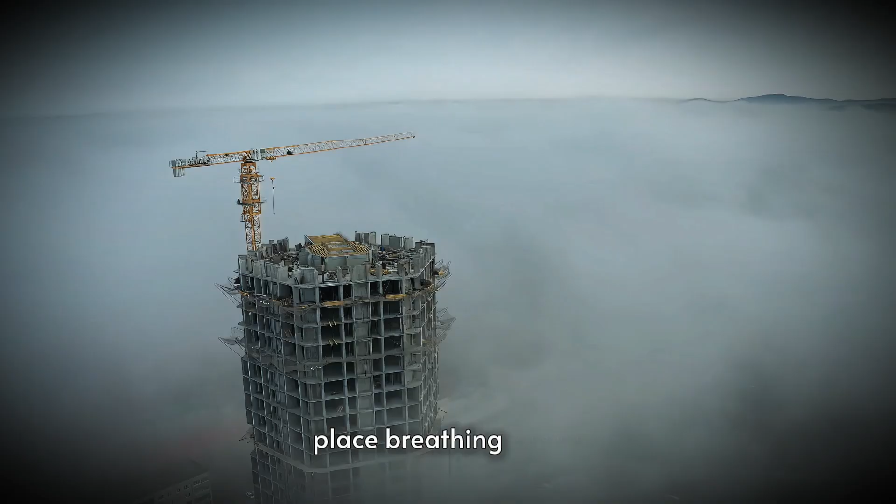In the lobby, down near the base of the main support column, a crack showed up like a thin black vein. Not wide, not dramatic, just enough to make every engineer in the room go cold. Because concrete doesn't crack in the middle of a celebration unless it's already been losing a fight for a long time. The air smelled like new paint and fresh stone, but under it there was another smell. Dust. A dry, chalky bite that shouldn't be there on day one.

You don't notice it if you've never been around stressed concrete. If you have, it hits you like a warning flare. A few people drifted closer, curious. They stared like it was a weird stain. Someone laughed. Someone said the building was settling. That word gets used like a blanket. Toss it over a problem and hope nobody looks underneath.

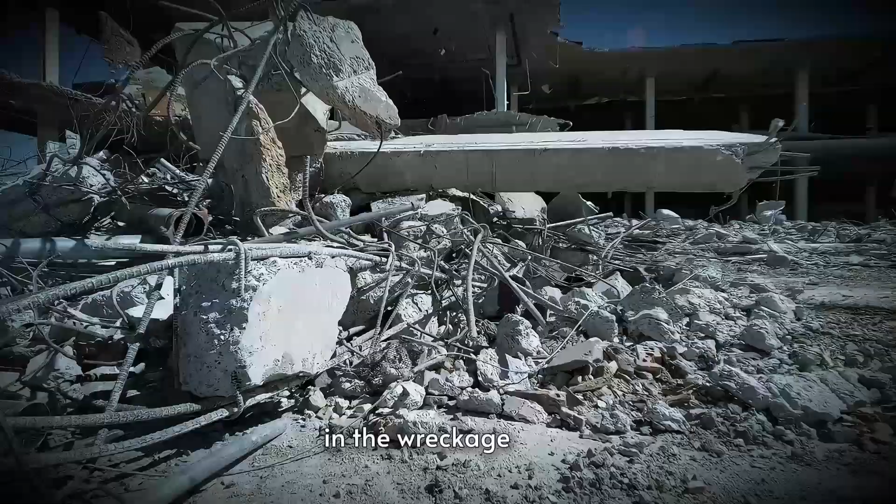But here's the thing. Settling is slow. Settling is a quiet math problem. This was a loud one. The crack climbed, millimeter by millimeter. Not fast enough for a stampede, just fast enough that a sharp-eyed worker stepped back and whispered, "That wasn't there." And now we're standing in the wreckage later, trying to answer the only question that matters. How did this even happen in a building that was supposed to be luxury?

Because the ghost detail is still out there, in plain sight. A high-end apartment block that looks perfect in photos. Glossy ads, clean lines, big windows, and it sits completely empty because it leans 3 inches to the left. 3 inches doesn't sound like much until you stand at the bottom and look up. Your eyes don't lie. The whole thing feels like it's slowly trying to fall over without making a scene. That's not a haunted house. That's an engineering mistake you can measure.

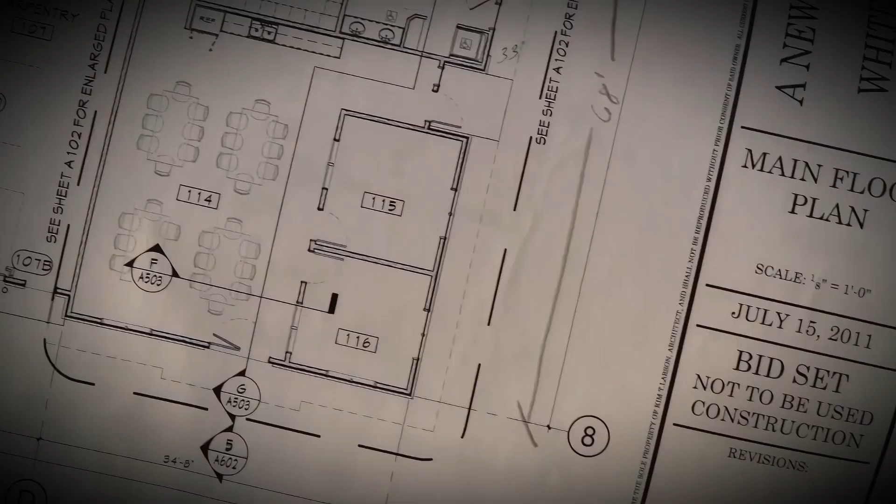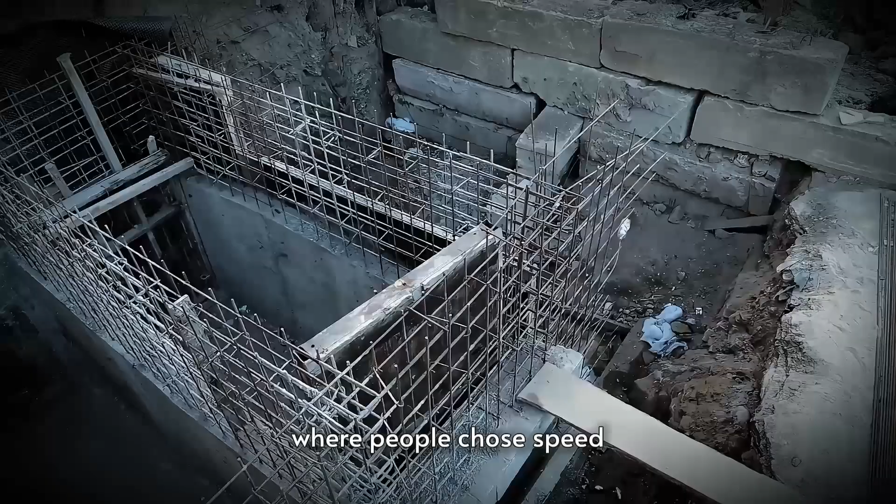And when you pull on the thread, you don't just find one bad decision. You find a chain. Blueprint error. Subsoil stability is ignored. A foundation failure that didn't happen in one dramatic moment, but in hundreds of quiet moments where people chose speed, money, and optics over reality. It starts with paper, not the concrete, not the steel, the paper. In the final drawings, the architect used the wrong units.

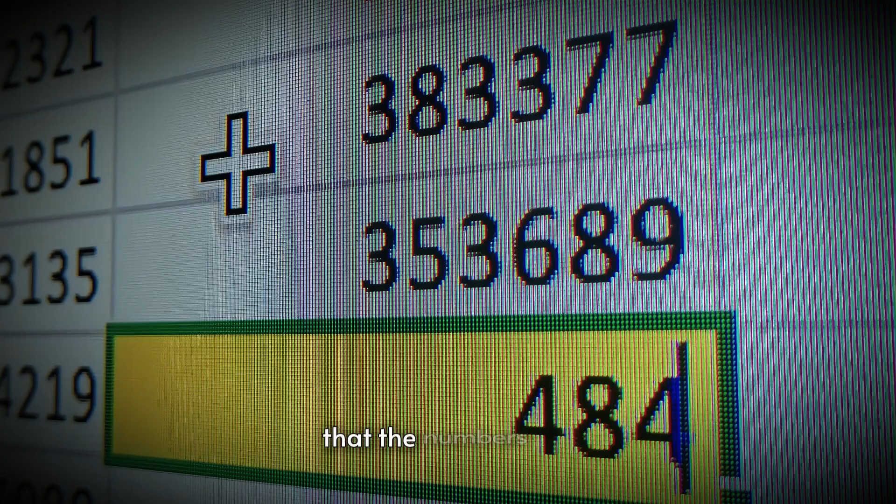That sounds small, harmless, like a typo, like something the software would catch, like something a whole team would never let through. But that's exactly how disasters begin, not with a villain, with someone tired, someone rushed, someone certain they're right, someone copying a detail from an older file and not noticing that the numbers are speaking a different language now. It's one of the oldest traps in engineering.

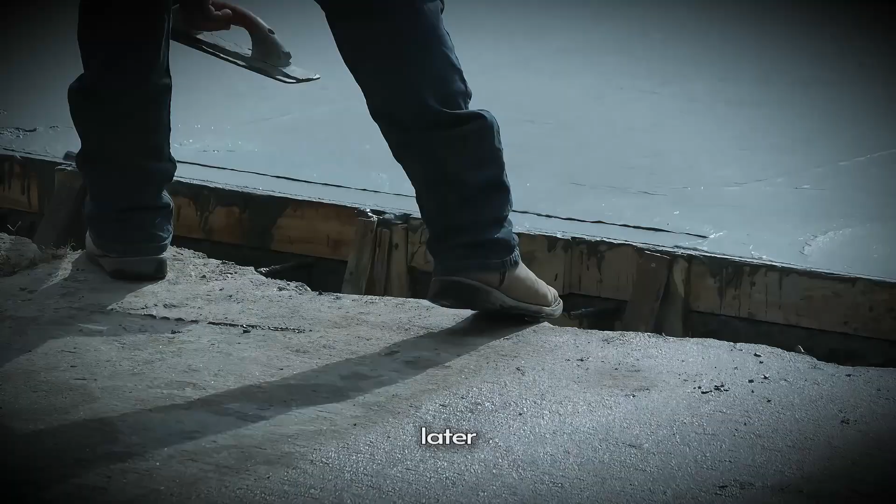Inches pretending to be millimeters. Feet dressed up like meters. A clean line on a blueprint that's actually a lie. And the lie doesn't show up on the screen. It shows up months later when you pour real weight onto real ground. The job moved fast. Too fast. The developer wanted an opening date locked to marketing and sales. The building wasn't just a structure. It was a product launch.

That changes everything. When the calendar becomes the boss, physics gets treated like a complaint. So people did what they always do under pressure. They trusted the drawings. They trusted the chain of approvals. They assumed somebody else had already checked the numbers. And out on site, crews built exactly what they were told to build.

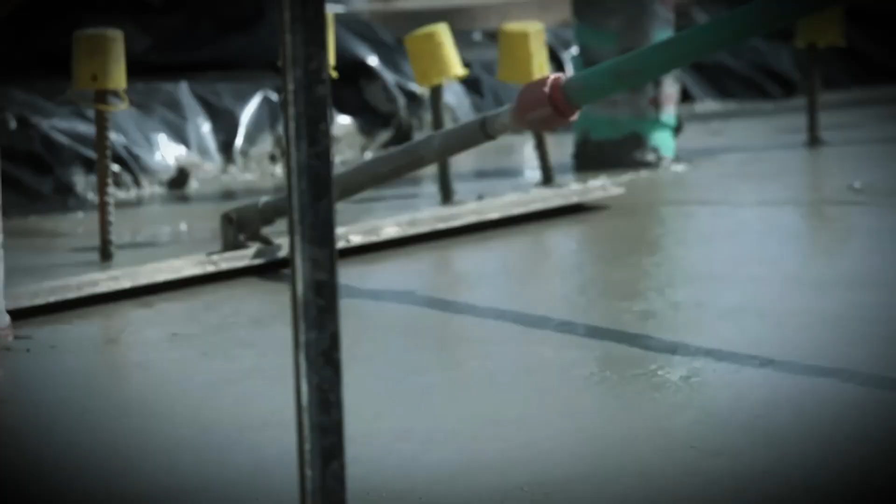The foundation design looked normal at a glance, clean, efficient, but it was tuned to the wrong scale. Depths, spacing, load assumptions, little values that don't scream when they're wrong. They whisper. They hide inside tidy diagrams and confident signatures. The soil under the site wasn't stable the way the brochure implied. The tests were there. They always are. A stack of reports, graphs, core samples, terms that sound official enough to stop questions.

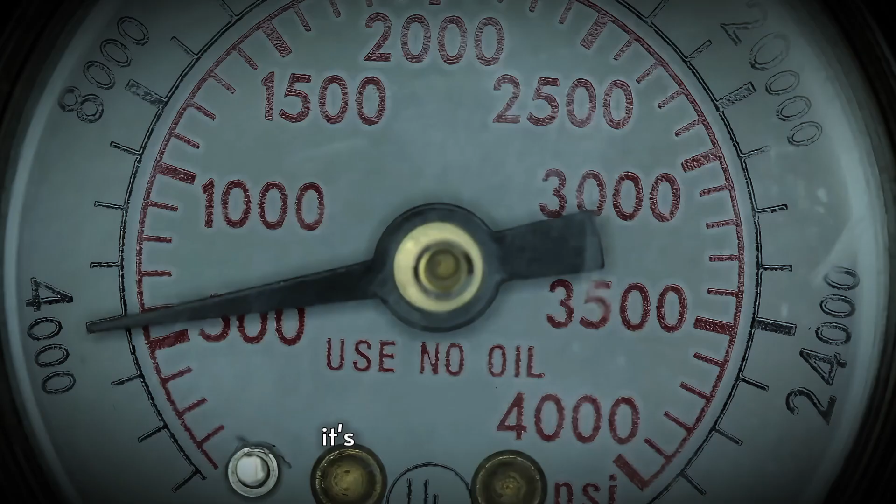But subsoil stability isn't a vibe. It's not probably fine. It's either bearing the load the way you expect, or it's waiting for the right moment to punish you. This site had layers, fill material, soft pockets, a history that the surface didn't advertise. The kind of ground that can hold for a while, then shift when water moves, when vibrations build, when the load path concentrates where it shouldn't.

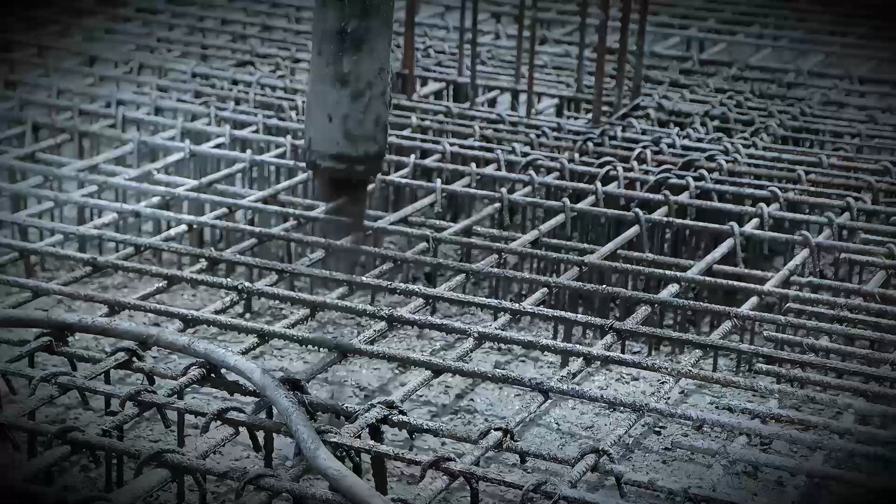You can build on difficult soil. Engineers do it all the time, but you don't do it by pretending the soil is something else. And that's where the blueprint error stops being a clerical mistake and starts becoming a mechanical setup for failure.

Because a foundation doesn't fail like a light bulb. It fails like a slow betrayal. It settles unevenly. It tilts. It creates stress where you were never designed for stress. Columns that should be purely compressed start to bend. Concrete that should be calm starts cracking like it's trying to speak.

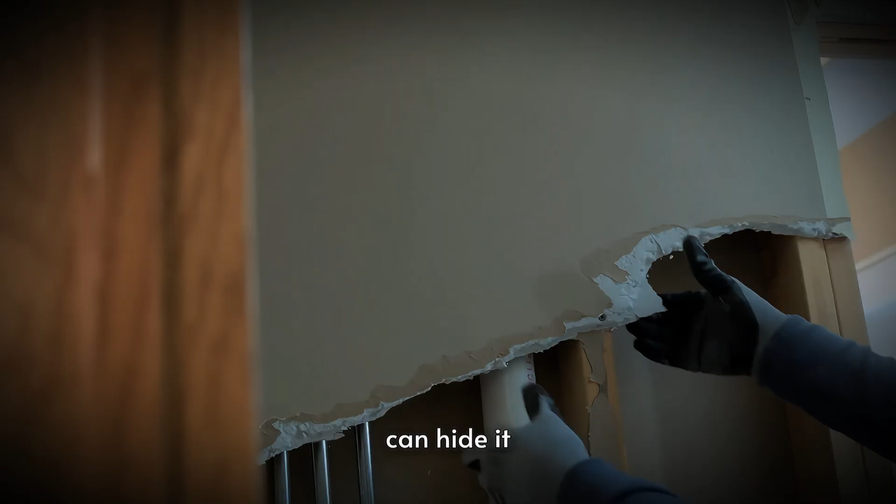At first, the building can hide it. Drywall covers tiny shifts. Decorative panels mask early fractures. The elevators still run. The doors still close. People walk through the lobby and feel nothing except pride. But the structure feels it.

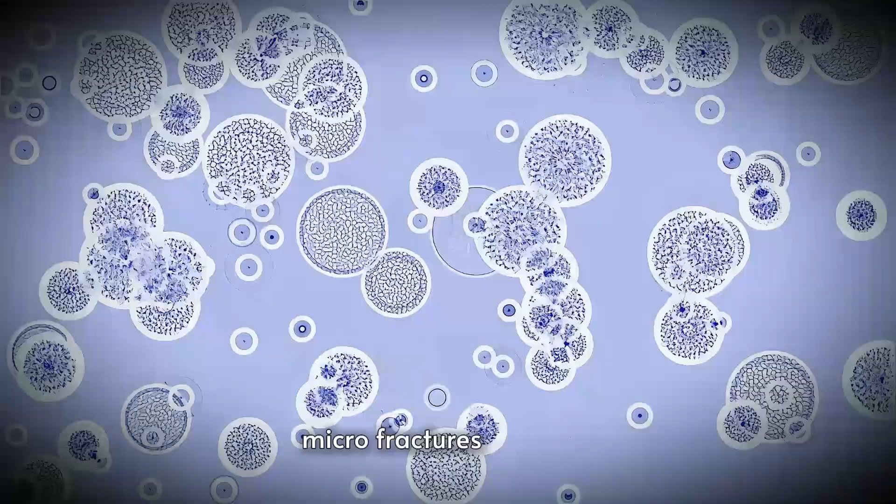You can see it later in the inspection photos. Hairline cracks around beam column joints. Microfractures that look cosmetic until you map them and realize they're forming a pattern. A pattern is the building telling you, my load isn't going where you think it's going. And the scariest part is how normal it all looked in real time.

Because the people on the ground weren't thinking about unit conversion. They were thinking about schedules, deliveries, inspections, curing time, and whether the pump truck would arrive before the rain. The people signing off were thinking about checklists and liability, and how to keep the project moving. Nobody wakes up and says, today I'm going to build a leaning luxury tower. They wake up and say, we're behind.

In the weeks before a grand opening, a building goes through this strange phase where it's finished enough to look perfect, but not finished enough to be honest. The lobby lights are on, the marble is polished, the brochures are printed. People walk through with hard hats off, talking about views and amenities like gravity is a solved problem.

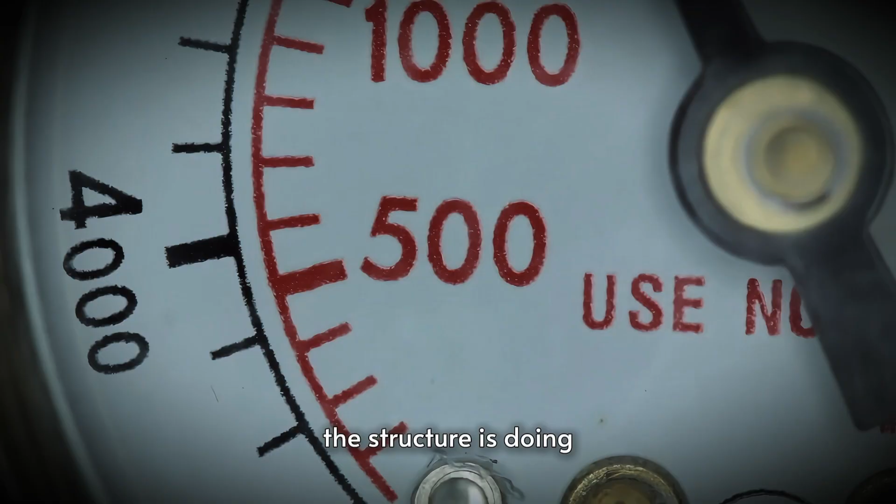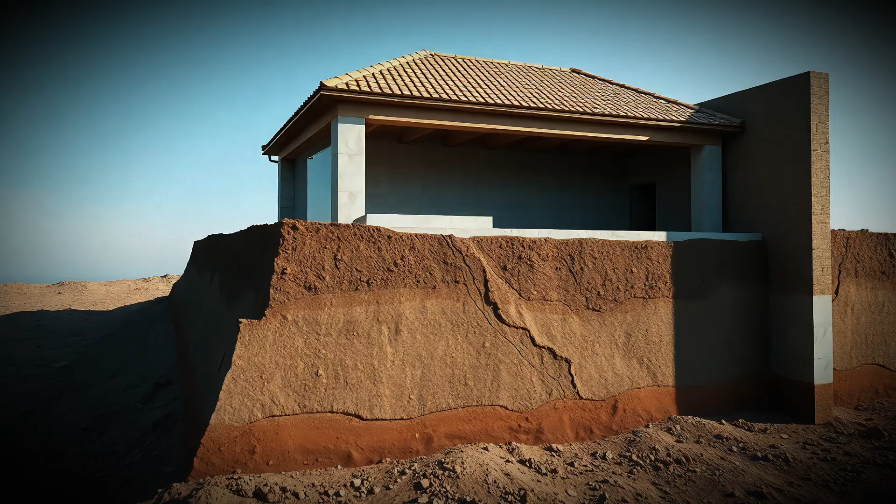And behind the scenes, the structure is doing math every second. Not the clean math from the drawings, real math: weight, moisture, temperature swings, vibration from nearby traffic, the tiny bounce of construction loads rolling across fresh slabs. All of it pushes on the foundation. All of it asks the subsoil the same question again and again. Hold. If the ground is solid and the foundation is right, the answer stays the same. If it isn't, the answer changes slowly, then suddenly.

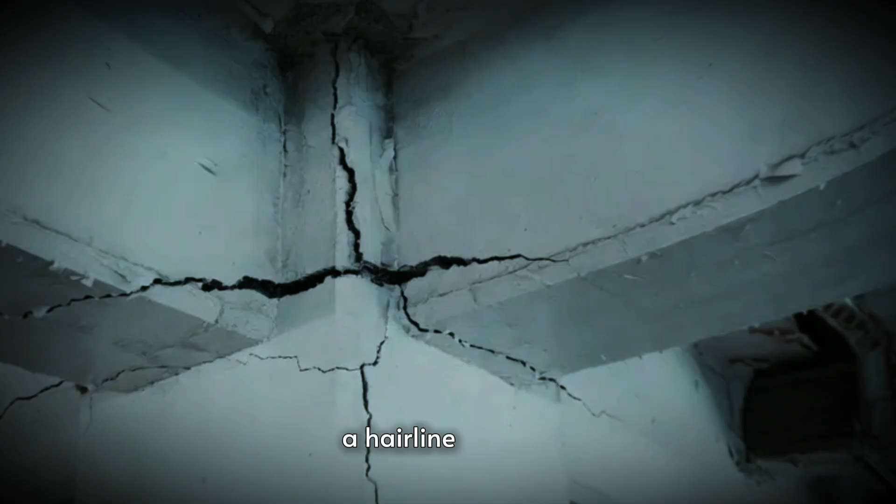That's why the earliest warnings are often boring. You don't see foundation failure. You see symptoms. A door that rubs only on humid days. A window that suddenly needs force. A floor tile that pops loose and gets replaced like it's cosmetic. A hairline crack in a corner that gets blamed on shrinkage. Each one is a vote to ignore, a vote to delay, a vote to keep selling the dream.

Because this wasn't just a building, it was inventory, units, revenue, investor confidence, a luxury launch with a price tag attached to every day on the calendar. And when money gets involved, failure gets managed like a PR problem instead of an engineering problem. Not, is this crack structural? But, do we have to call it structural? Not, is the foundation moving? But, can we monitor it quietly?

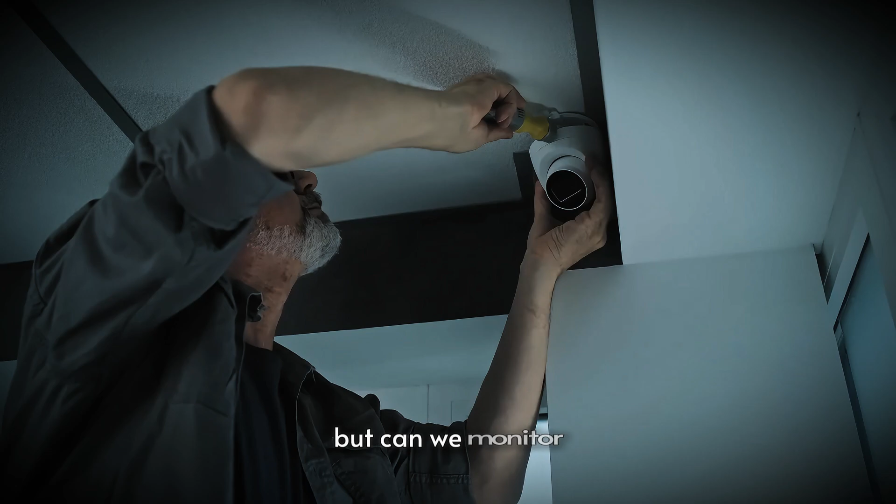Monitoring becomes a ritual, a clipboard, a few photos. Someone draws a line with a marker and writes a date next to it. Someone else takes a measurement and shrugs because it hasn't changed enough. Enough for what? Enough to scare the right person? Enough to stop the opening? So the building keeps talking, just not loudly enough for the public to hear yet.

Then comes the grand opening. The building is full of new loads it didn't have during construction. People, furniture, equipment running, HVAC cycling hard, water in lines, and most of all, vibration. Footsteps, doors slamming, elevators running non-stop, music in the lobby. Nothing dramatic, just enough to nudge a stressed system right up to its limit. That's the pivot point you can almost see in slow motion.

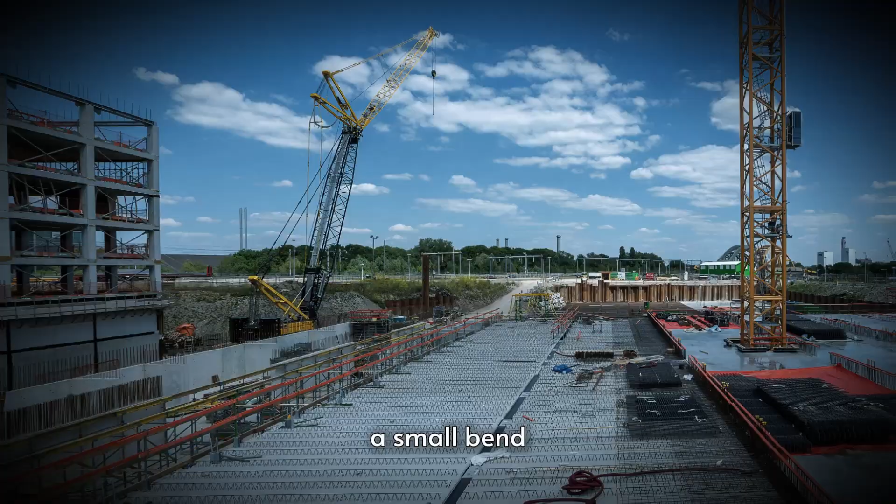A column under axial load starts to take a small bend because the foundation under it isn't level anymore. The concrete on the tension side starts to micro-crack. The rebar takes tension like it's supposed to. But if the detailing, cover, or placement is even slightly off because the drawings were wrong and the field followed them faithfully, the margin is thinner than anyone thinks.

The crack becomes visible. Not because it just started, but because it crossed the line where invisible damage becomes visible evidence. And when the first crack showed itself in that lobby, it did it like a whisper turning into a voice. A thin line, then a small branching. A faint pop you feel more than hear. The kind of sound that makes your stomach tense because your body knows it before your brain does.

People step back, phones lower. Someone says, "Is that normal?" And now the building has witnesses. Now the building has to perform because it can't hide anymore. That's the moment every construction disaster quietly circles. Not the start of the project, not the budget fights.

The moment the system fails in public and the humans have to choose what they value more, honesty or momentum, because the cost of doing the right thing is immediate and visible. The cost of doing the wrong thing is delayed and might become someone else's problem. And that's why that empty luxury building still sits there leaning 3 inches to the left.

Not because nobody knew, but because enough people kept choosing later. The crack in that lobby is the kind of warning you can still argue with. People will say it's cosmetic. They'll say, concrete does that. They'll say the building is new, it's stretching its legs.

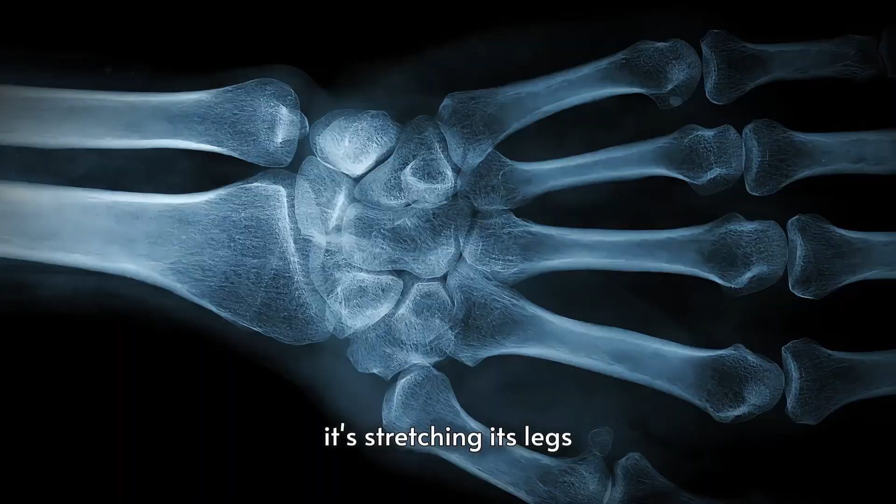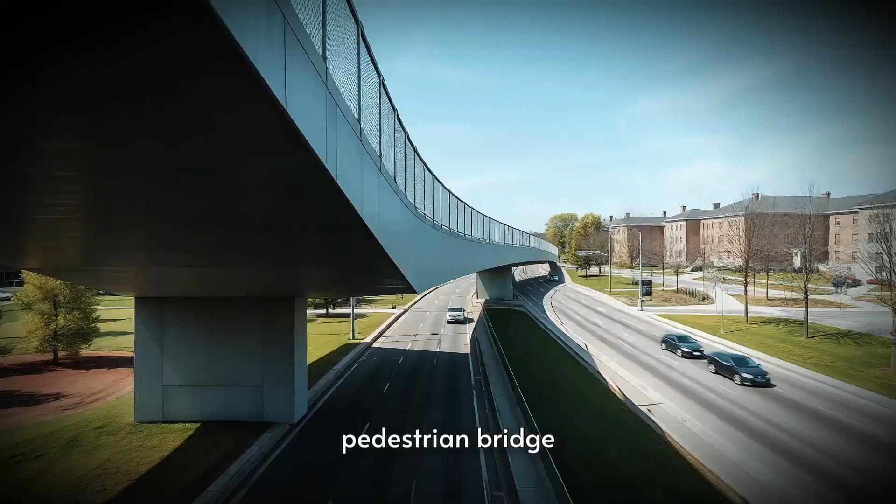But there's another kind of warning that's harder to deny. It's when the structure tells you, straight up, that it's already failing, and the system decides to keep going anyway. In Miami, 2018, there was a brand new pedestrian bridge outside Florida International University. Fresh concrete, clean lines, the kind of project that's supposed to scream progress.

And then, before it even opened for foot traffic the way people expected, it gave off the same kind of message your body recognizes before your brain does. Cracks, big ones, not hairline, not paint will cover it. These were cracks that showed up in a critical zone and didn't look like shrinkage. They looked like stress choosing a path.

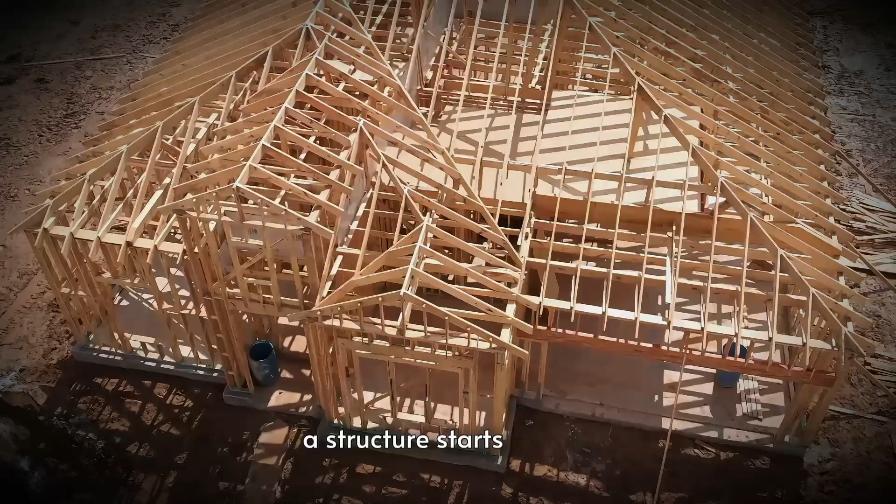People saw them. Engineers discussed them. Meetings happened. It wasn't a secret, and that's what makes it terrifying. Because the bridge didn't fail in the dark. It failed in daylight, with warning signs on the table. If you ever want to understand how human error becomes mechanical failure, it's right there in that sequence. A structure starts talking, the people in charge hear it, and the machine of deadlines and pride keeps rolling.

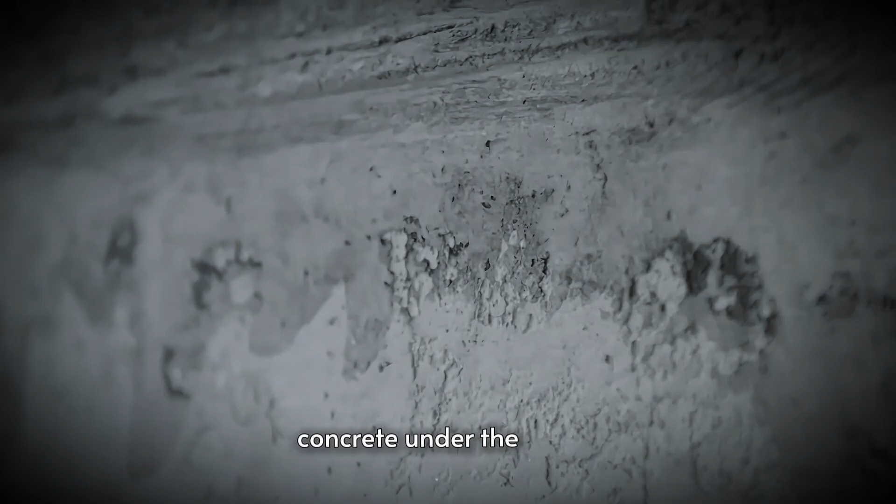That day, traffic still moved underneath. Cars, trucks, normal life. And above that road, the bridge sat there like a loaded spring. Concrete under compression is calm. Concrete under the wrong kind of load starts to feel brittle, like it's holding its breath. The sound people describe around failures like this isn't always a big boom at first. Sometimes it's a sharp pop, a deep crack, a weird grind.

Then the air fills with dust so fast it looks like smoke, and your ears ring because the collapse isn't just loud, it's pressure. The kind of pressure that punches you in the chest for a half second and makes everyone nearby freeze like their instincts hit the brakes. There's a moment in every collapse that's almost unfair. A fraction of time where the structure hesitates, where gravity is already committed, but your eyes haven't accepted it yet.

Then, it goes. A bridge doesn't fall like in movies. It doesn't neatly fold. It drops heavy. It shatters. It slams the road like the ground just got hit by something alive and angry. And the dust that comes off concrete isn't like dirt. It's finer. It hangs in the air. It sticks to sweat. It turns your mouth dry instantly.

People cough without choosing to, and after, you always see the same thing in the footage. Cars crushed into shapes that don't look real. Workers running with that stiff, panicked posture. A cloud drifting over the street while everyone tries to understand what the math just did. The technical side matters, but what matters more is the decision point before it happened. Because cracking is the bridge telling you, my load is not going where you think it's going.

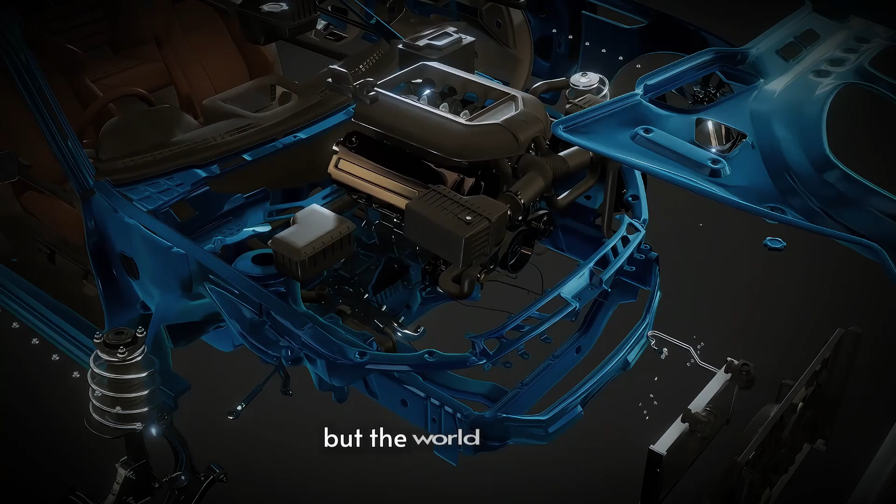But the world doesn't run on engineering instincts. It runs on momentum. People wanted it done. People wanted it open. People wanted to believe the project was still under control. So they kept talking about fixes and adjustments, like the structure was a negotiation. And the bridge didn't care. A structure doesn't care how much you've spent. It doesn't care who's embarrassed. It doesn't care what the press release says. It only cares whether the forces make sense. When those forces don't make sense, concrete stops pretending.

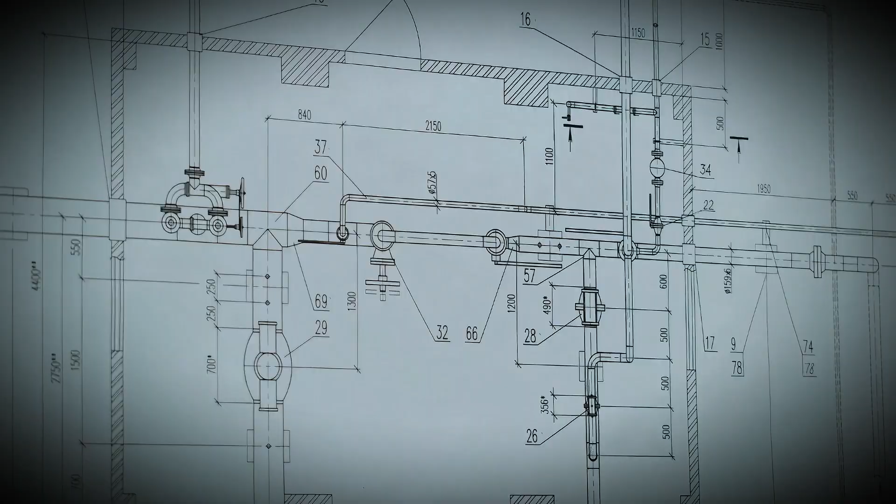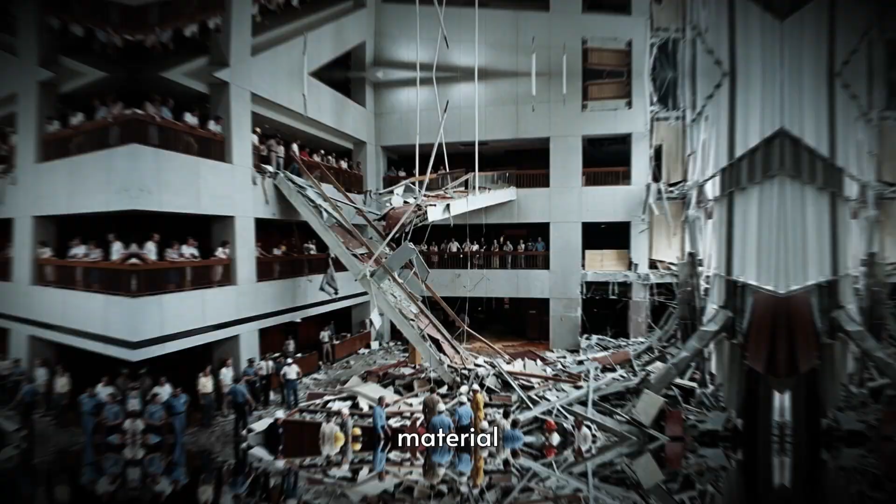And you can feel the pattern between these disasters once you see it. A blueprint can be wrong by units and still look normal. A foundation can be wrong by inches and still pass through close enough. A bridge can crack in public and still get treated like it's manageable. And every time, the danger isn't only the material. It's the pause after the warning, when someone with authority chooses the cheapest interpretation.

That's the human error part nobody likes to own. Because it doesn't sound like sabotage, it sounds like optimism. We can handle it. We'll monitor it. We're almost done. And then the pivot point hits, and all that optimism becomes evidence.

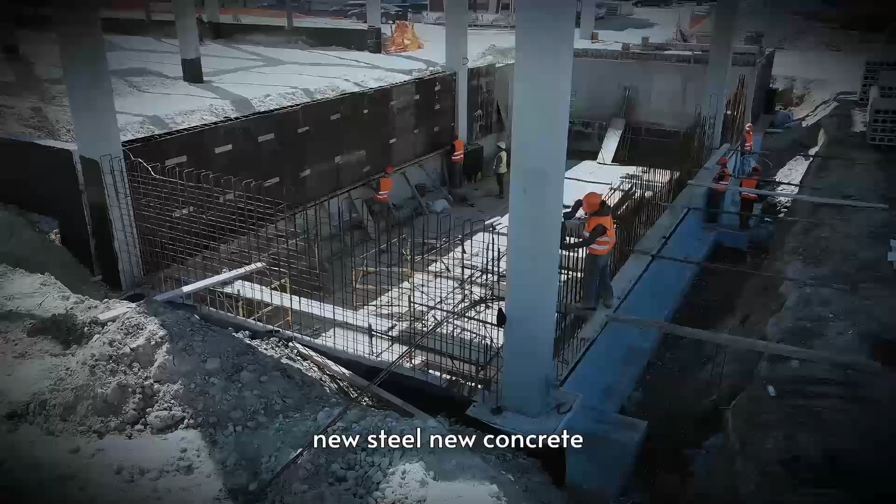Now, if you want a collapse that smells like pure schedule pressure mixed with negligence, you don't even have to stay in Florida. Go to New Orleans, October 12th, 2019. A high-rise going up downtown, the Hard Rock Hotel project, tall enough to feel permanent. New steel, new concrete, a crane sitting above it like a mechanical spine.

Then the building partially collapses mid-construction. Multiple floors come down. The site becomes a jagged mess that looks like somebody tore a chunk out of the skyline with their hands. This one doesn't feel like one thing broke. It feels like a chain letting go, link by link. Steel isn't supposed to surprise you.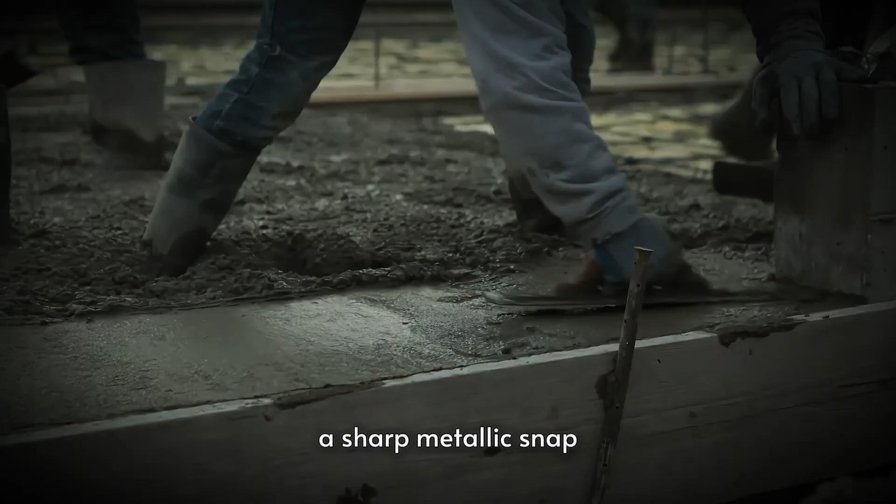It's supposed to give you warning through bending, through deformation, through visible distress. But when a frame loses the integrity of its connections, the warning can be nothing more than a sound. A sharp metallic snap, a tearing scream like sheet metal ripping but deeper. Then the ground shakes with that sickening heavy rhythm of sections dropping and hammering what's beneath them.

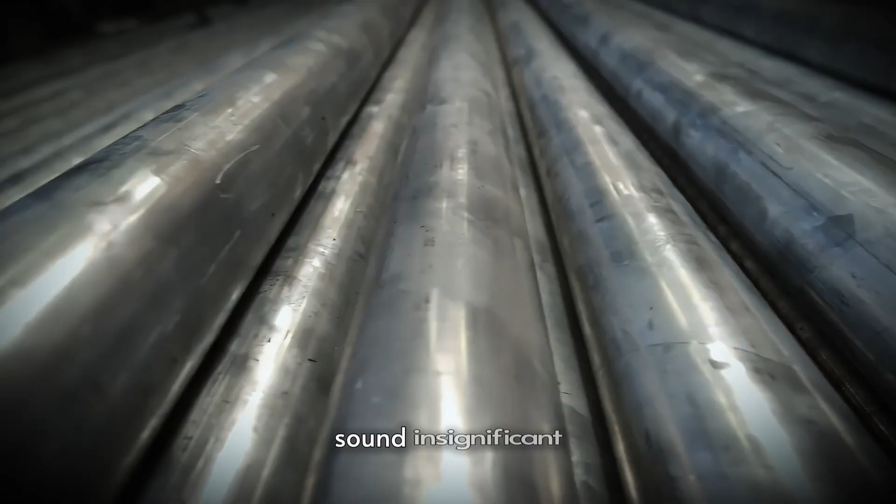Dust doesn't rise. It blasts outward. Concrete powder and hot machinery smell mix in the air. And in the footage, the city looks stunned, like it's watching the laws of physics break a promise. Later, the details that emerge are the type that leave engineers staring at each other in stunned silence. Bolt connections. It may sound insignificant, but that is the kind of thing that seems too small to cause harm until you remember what steel truly is.

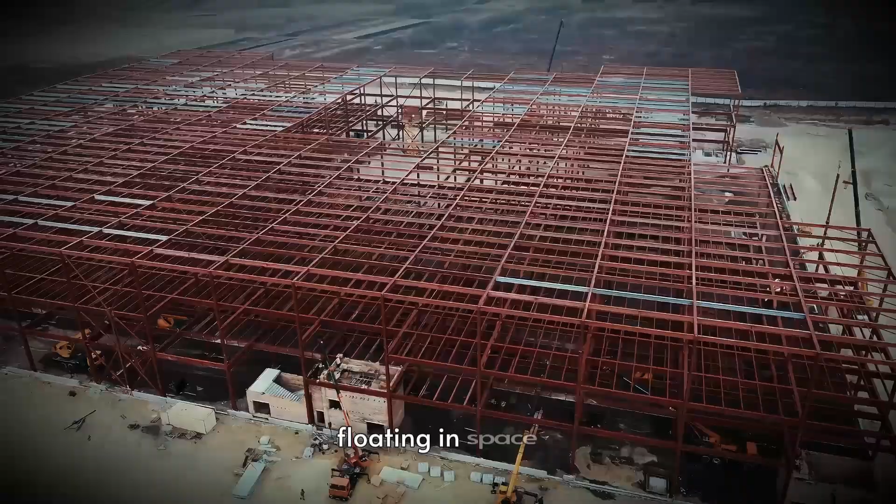A steel building is not just steel beams floating in space. It is a system, a chain, a series of promises at every joint that say, when load comes here, I will carry it and pass it on. If one joint fails, the load does not vanish. It moves on, searching for the next weakest point.

So when people talk about a collapse, picture it accurately. It is not a single event. It is a redistribution, a sudden shift in demand. A frame that was stable at 9:59 becomes unstable at 10:00 because one connection exceeded its limit and dragged the rest down with it.

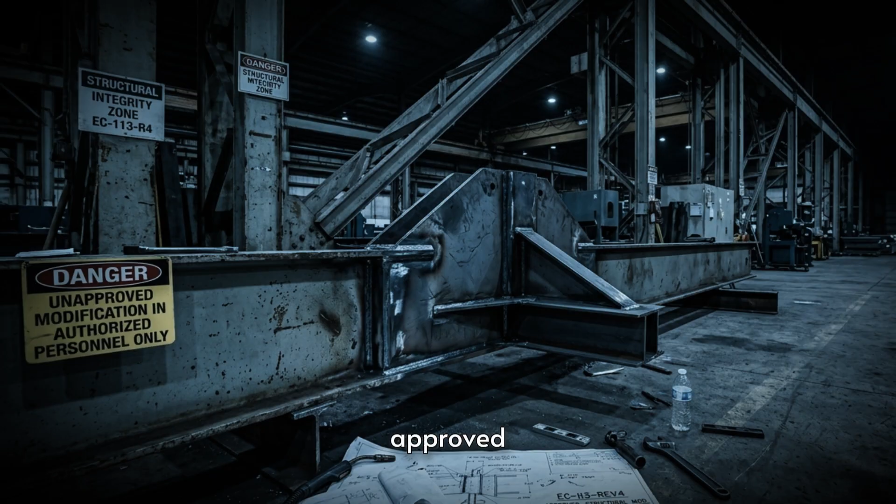The reason Miami and New Orleans share a link with the leaning luxury tower is because they reflect the same human behavior. Warnings are given. Margins are treated as optional. And when the system fails, everyone acts like it came out of nowhere. But it did not. And the next failure is worse, because it is not a hidden error or a crack that sparked debate. It is a change made intentionally, approved, and quietly turned into the deadliest form of surprise.

Kansas City, 1981. A hotel atrium with suspended walkways, full of people, music, movement, a typical night. Then, above them, a small decision becomes deadly. A design tweak in the hanger connection, something you could explain in a sentence, redistributes loads in a way that doubles the pressure on a critical component. It looks good on paper, but in reality it creates a hidden overload waiting for a crowded moment.

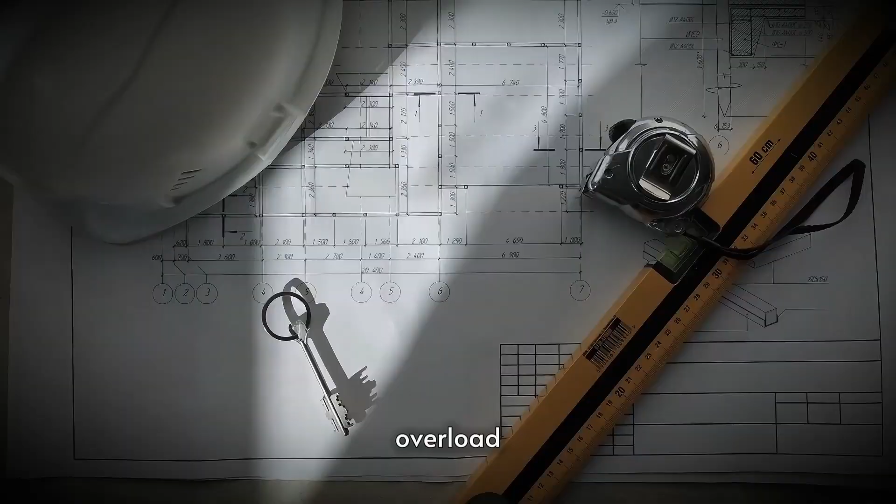The tipping point is not dramatic at first. It is the instant when the metal reaches its breaking point. There is no warning, just a sharp snap that cuts through the room like a gunshot made of steel. Then a grinding scream as the connection breaks, and the walkway crashes down.

The warnings showed up the way they always do when a structure is being forced to lie. Cracks that do not match cosmetic shrinkage. Vibrations you feel in the floor more than you hear. A building that starts talking through its finishes. And the dangerous part is the human reaction: delay, dismiss, keep the doors open a little longer because closing costs money now, and collapse costs money later.

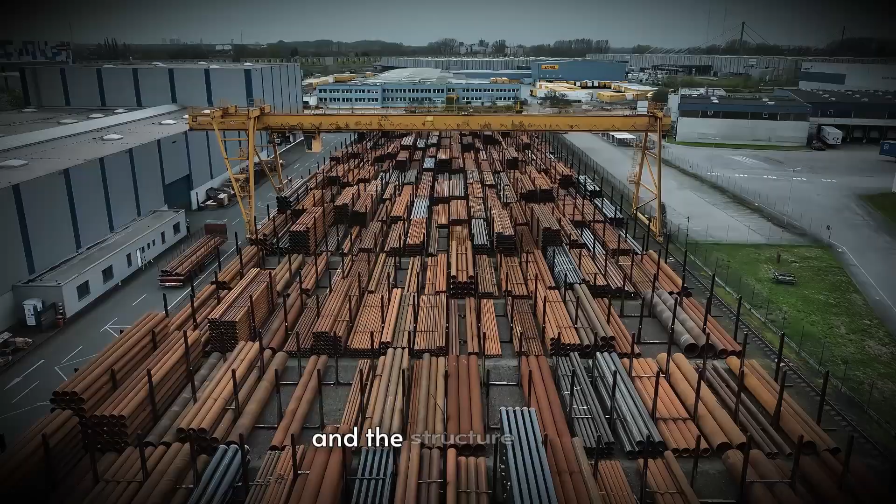When the pivot point arrives in these failures, it is never polite. It is that split second where the system's last margin disappears. One critical area gives, loads jump to places already near their limit, and the structure stops behaving like a building and starts behaving like falling mass. You don't need a cinematic setup to understand it. You just need the sound. Concrete cracking like a thick branch under your boot, multiplied by an entire floor. Then dust, so fast it feels like the air itself turned solid for a moment.

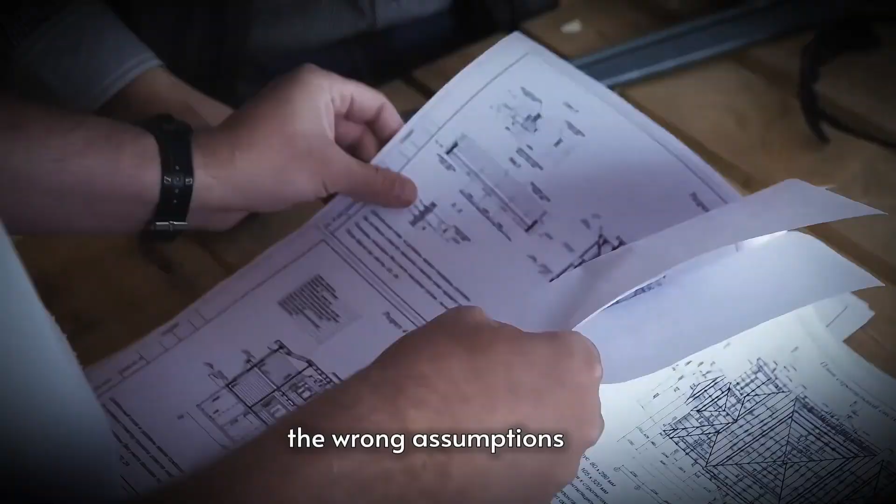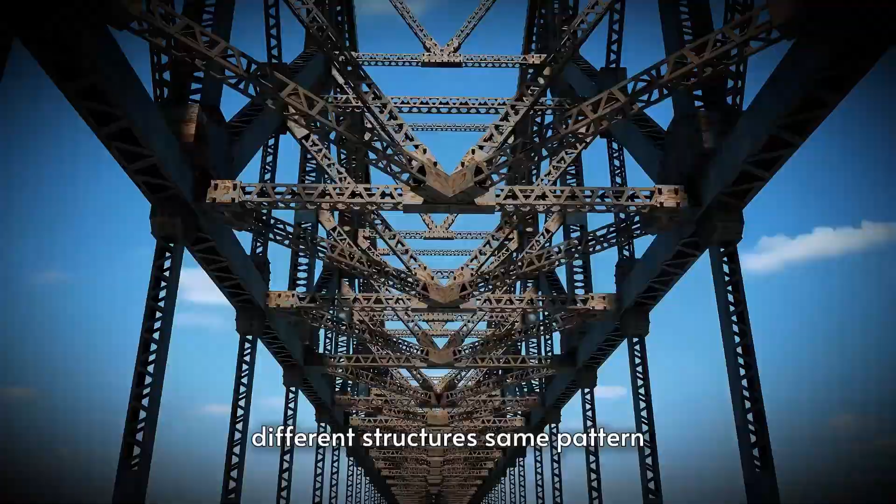Now stitch these failures back to the first one. The leaning luxury tower with the wrong units, the wrong assumptions, the subsoil that didn't forgive, the foundation that settled unevenly and turned a clean column into a warning siren. Different structures, same pattern: tiny choices, quiet compromises, a checklist mentality that treats physics like it's negotiable, pressure that turns stop into monitor, people trusting familiarity more than they trust evidence.

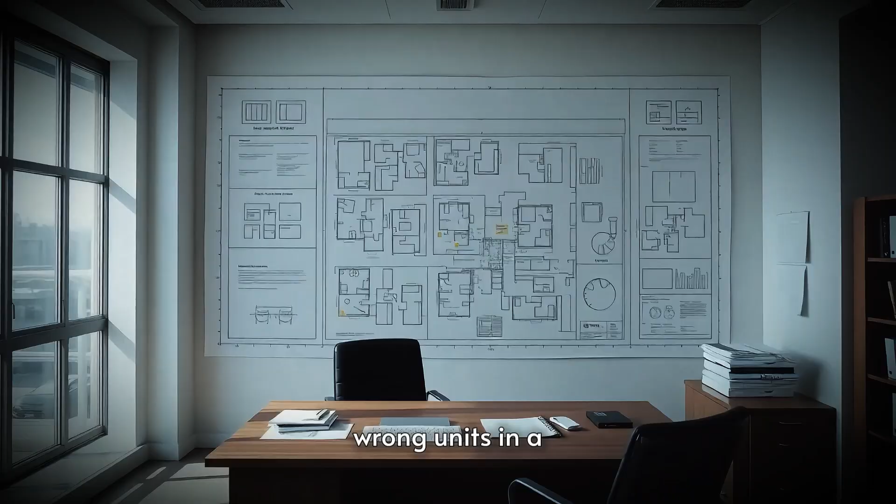And if you want the ending to feel honest, you return to the first sound. That metallic screech wasn't the building being dramatic, it was the structure translating a chain of decisions into sensation. Wrong units in a final drawing. Ground that wasn't as stable as the brochure promised. A foundation that couldn't spread load the way the math claimed. Stress rerouted into the main support until the column finally said out loud what everyone had been avoiding.

The crack in the lobby wasn't a beginning. It was an announcement. And the reason these stories stay with you isn't just that things broke. It's that so many of them broke while people were still insisting they were safe. You walk into places like this every day. You trust the concrete, you trust the steel, you trust the approvals. And then you learn how thin that trust can be, when a single, overlooked detail turns into a sound you feel in your teeth. You would never have guessed it would happen this way.